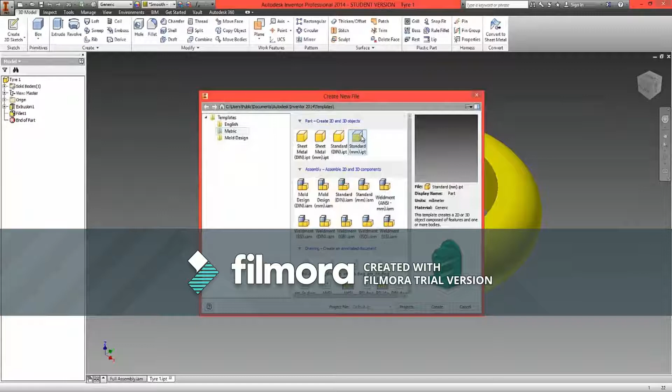First, in the top left corner of Inventor, choose the application button, choose New, and under the metric tab select Standard Millimetre IPT Part, then select Create. We are now modelling a new part.

From the top ribbon we're going to choose Create 2D Sketch, which has a shortcut of the letter S on the keyboard, and in the appearing datum planes we're going to choose the XZ datum plane. Select it and we move into a quick 2D view. From the top ribbon we now have a range of 2D drawing tools.

We're going to select the circle tool and snap to the central dot, which will appear as a green dot. We click out and enter a value of 110mm, then hit enter on the keyboard. When we resize with the navigation box in the top right, we can now see the outside circle of the wheel.

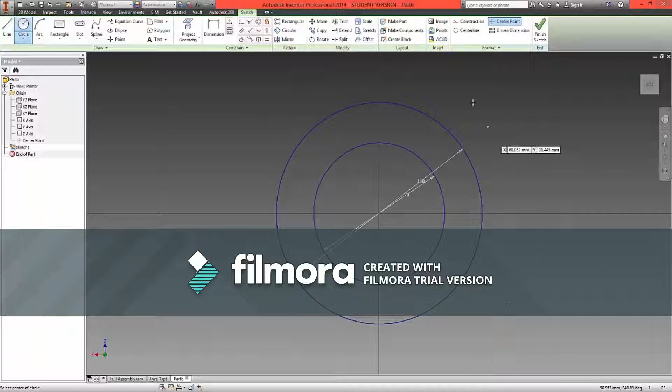We're going to use the same circle tool again, click to the centre, this time dragging out and entering a dimension of 70mm, again hitting enter on the keyboard. We now have two concentric circles lined up to the central point, shown in blue because they're both constrained and dimensioned and ready to work with.

Right click and choose Finish 2D Sketch. Using the navigation box we're going to resize, and we now have this donut shape. What we're now going to do is extrude this shape.

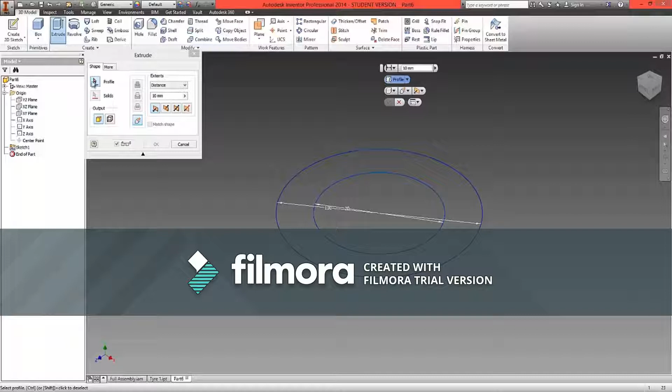We choose from the ribbon above either Extrude, or click the letter E on the keyboard, and we're going to choose to select the profile from the pop-up box. We're going to choose the external ring, which is now shaded in grey, and extrude this 24mm by entering this into the pop-up box and selecting OK. We now have extruded a solid donut shape.

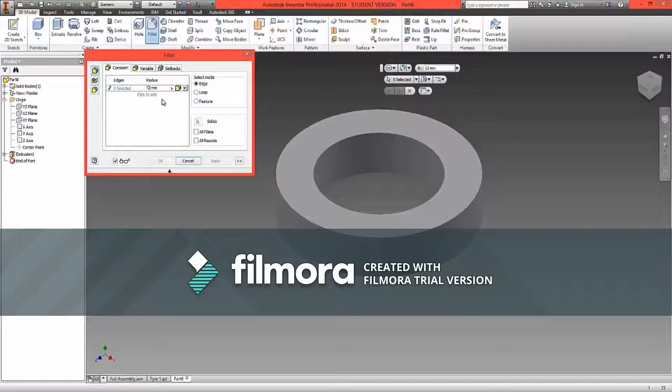We're now going to apply a fillet to the edges to create a round, using the fillet tool in the ribbon or the shortcut key F. We enter a radius of 12mm, then clicking into the model we click the top edge and the bottom edge, and we can now see a preview of the fillet applied. We're happy with this, so we click OK, and we've now finished the wheel.

The second approach is slightly different. In this approach, create a new file, standard millimetre IPT part, and again create a 2D sketch using the Create 2D Sketch button from the ribbon.

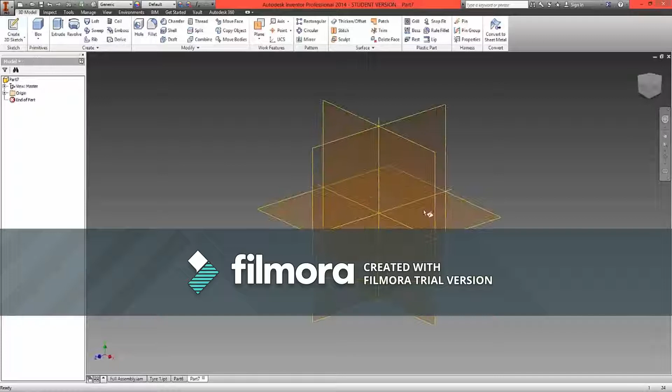Again select the XZ datum plane, and this time we're going to choose the rectangle tool from the ribbon instead. From the central dot, moving to the right, we're going to draw a rectangle. This rectangle will be spun around a central axis and will give us our solid donut shape.

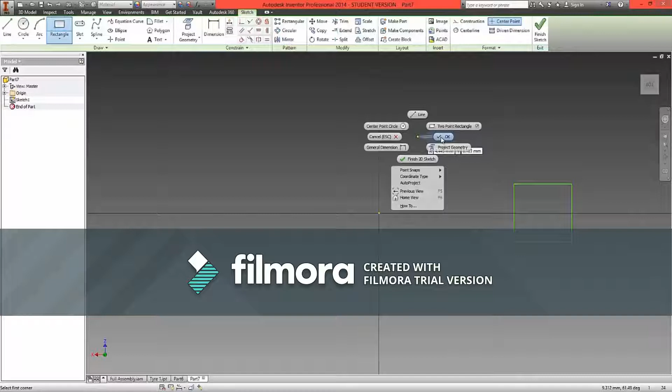Right click and click OK to lose the rectangle tool. The rectangle itself is now green. In the previous attempt we had blue line work which showed that it was both dimensioned and constrained. This is neither dimensioned nor constrained, so we need to do these things now.

First we're going to constrain. In the ribbon above we choose from the constraints the option to apply a horizontal constraint. The middle of this line of the rectangle, if we click, lines up horizontally to this central point here, which has now been applied. This means that if we change this rectangle dimension, it will always lie centrally along this line.

We're now going to use the dimension tool from the ribbon, and dimension this internal edge. We click once, drag out, click a second time, and enter a dimension of 24mm and hit enter. Using the navigation box, we resize to see what we're looking at.

We're now going to set the distance of this central internal line to the middle. So click once, drag to the left, click the central point, and then drag down. We enter a measurement of 35mm. This will give us a total diameter of 70mm.

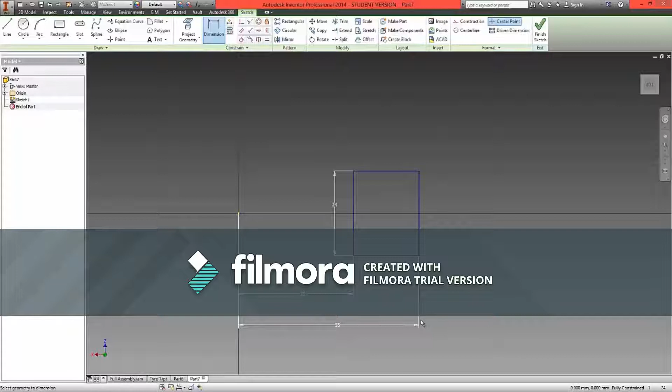We then click the external edge, drag to the left, click the central point, and drag down, this time entering a measurement of 55mm and hitting enter. This will give us an external measurement of 110mm, and this internal height will be 24mm. Right click and choose Finish 2D Sketch.

Our task is now to spin this rectangle around a central axis. To do this, we choose Revolve, or the shortcut R from the keyboard. The profile has already been picked up and is highlighted in blue. So what we need to do now is find the axes.

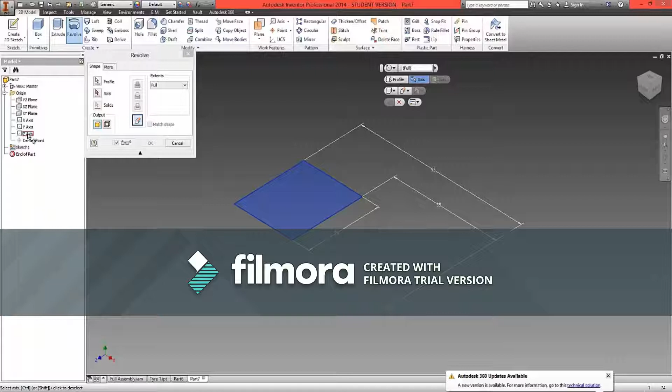If we choose the Axes tool from the pop-up and look under the Origin tab on the left hand side, we can see an X, a Y and a Z axis. In this instance, the Z axis will give me something useful to rotate my drawing around. So we click the Z axis, and as you can see in the preview, it now rotates around and gives me my donut shape.

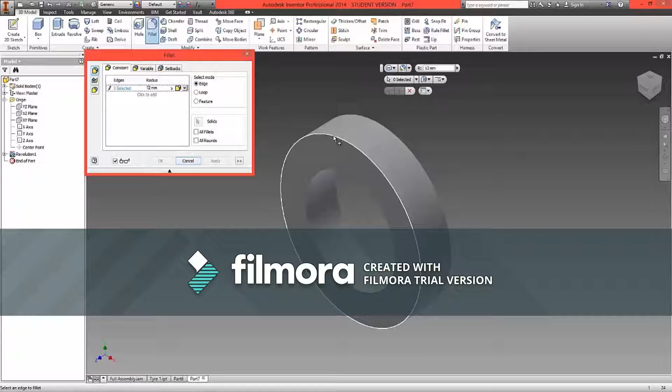Click OK. We're then going to apply the fillet with the shortcut F, enter a radius of 12mm again, and choose the top edge and the bottom edge. As you can see from the preview, we have filleted the final shape. So two modelling approaches, both very different, but both with the same outcome.